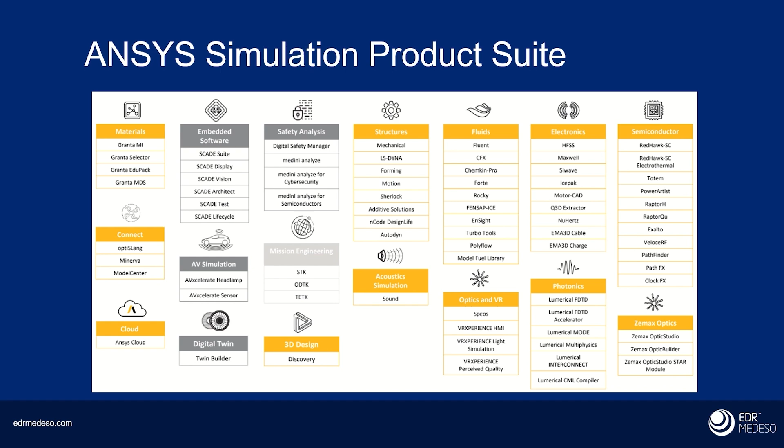So I guess the motivation for using simulation software in space specifically is the same as any product, really. There's a phrase that gets used that you've got to get a design right first time, and simulation helps you do that. It helps you test your product in those scenarios that it's going to be operating in. And that's never really more important than it can be in space, where it really has to work first time.

So we see a lot of developments on the commercial space side, lots of companies springing up, startups and so on, rapid development cycles, alongside the existing R&D in the academic institutions and the government agencies as well. So a highly active industry area.

It's very important to get these designs right, and simulation can play a key role in that. If we consider any product that has to operate in space, you can see there's all sorts of physics occurring, and they're not working independently. We quite often have to consider interacting physics, whether it's electronics, cooling, thermal considerations, fuel or propellant management devices on the fluid side, and also a lot of materials technology that goes into these products. So it's a wide array of potential applications where simulation technology can help.

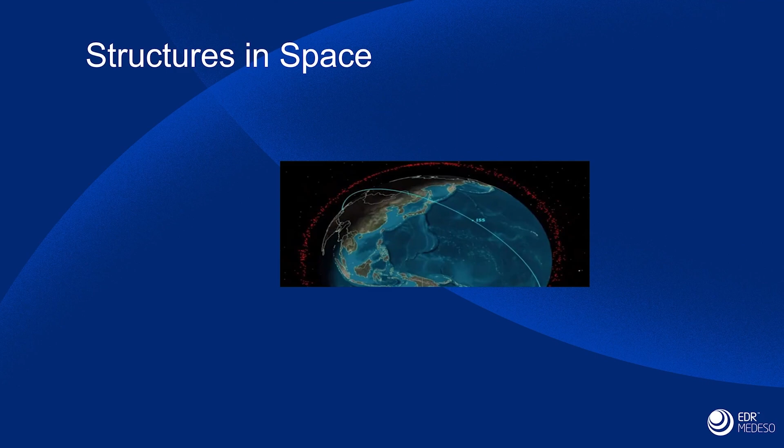Thanks, Steve, and good morning, everybody. I've only got about 15 minutes, so really what I'm going to give is a light touch introduction to a few examples of structures analysis in the space context, ranging from coupled thermal, optical, and structural analysis, to standalone mechanical analysis, impact and explicit methods, right through to PCB reliability and composites assemblies. Then in one example I'll go into a bit more detail on the steps involved in a CubeSat analysis.

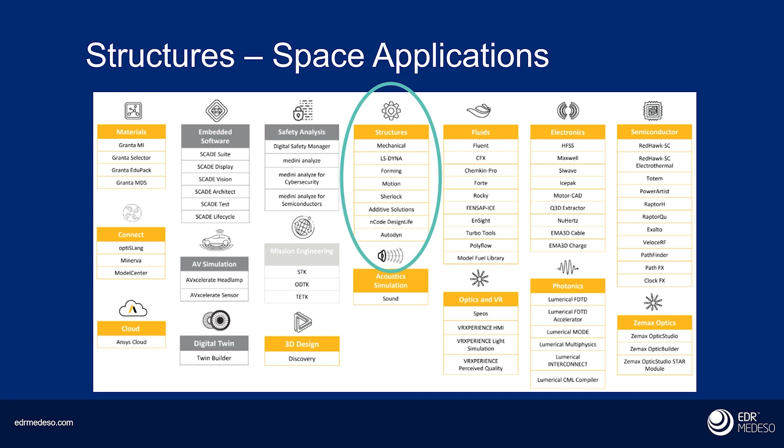As mentioned, I'm going to focus on the structures subset of the Ansys portfolio—ranging from Mechanical, LS-Dyna, and Sherlock right through to Design Life. But I'll also talk about how these products interact with the other physics solvers available, and I think that's a theme running through this whole webinar.

First, a bit more detail on the various structural products. On the left here we've got Ansys Mechanical, perhaps the original and core structural solver of the Ansys portfolio. It provides an incredibly broad range of implicit static and transient analysis methods, some of which we'll touch on today. It's capable of structural, thermal, and vibration analysis amongst many others, and has a really strong focus on providing coupled analysis methods with other solvers, which we'll also talk about.

Then we've got the explicit solvers—LS-Dyna and Ansys Explicit, which isn't shown here but is part of the Ansys suite, and also Autodyn. These enable analysis of highly non-linear scenarios, or events involving extreme degrees of deformation or significantly changing contact conditions, or which occur over short durations—explosive or hypervelocity events. LS-Dyna in particular also offers a strong baked-in multi-physics capability with fluid, electromagnetic, and thermal solvers.

We've also got more manufacturing-oriented products such as Ansys Forming for metal stamping, and the additive solution for simulating additive manufacturing processes, which has in fact been used to great effect in recent space applications. Then there's Sherlock, which provides predictions for electronics hardware, looking at thermal and vibrational durability of PCB assemblies, for example.

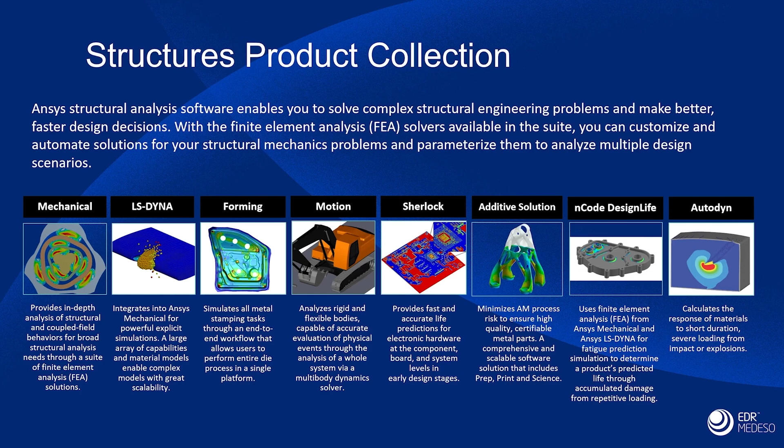In space, the structural response to thermal loading is clearly of key importance, and this functionality is one of the primary analysis methods available in Ansys Mechanical. We can represent the thermal properties of various materials—things like expansion coefficient, conduction, convection, and radiance coefficients—and investigate how those thermal loads and heat transfer will affect the structural performance of our systems.

These materials data are available within materials databases in the Ansys suite. There's another product called Granta, a very full-featured and rich source of materials data, or you may have your own bespoke properties which you can input—things like thermal expansion coefficients, Young's modulus, or Poisson's ratio. What we want to do is predict how thermal and heat loading will affect structural performance, ranging from a straightforward differential expansion problem right through to utilizing the latent heat capabilities of wax solidification to provide cooling in heat pipe systems.

I mention that because it was done quite recently on the James Webb Telescope, so I have some knowledge of that. In addition, you'll see I've mentioned Icepak here. This touches on the coupling capabilities within the suite, which are a massive focus within the Ansys environment. Icepak enables a heat transfer solution using a CFD method within the satellite components, and this predicts the conduction, convection, and radiation. Those resulting thermal loads are fed back into mechanical to provide thermal boundary conditions, enabling the structural response to those thermal loads to be investigated.

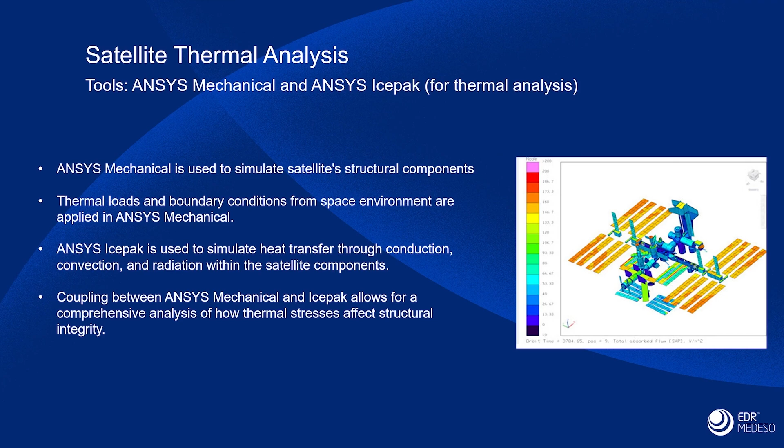Another example of the importance of including thermal effects is their effect on optical performance. Everything these days needs an acronym, so this is referred to as STOP, Structural Thermal Optical Performance. What you can see here is an example of an optical mechanism where the transient thermal analysis drives a transient structural analysis, with a link to SPEOS in there, which enables optical analysis. So you can see the transient thermal driving a transient structural, with a SPEOS input there.

This system is subjected to a 3-hour sun load, for example, and the loading from that exposure to the sun can then interact - we can generate the thermal loads and look at how that affects the deformation of the structure, and ultimately how the optics behave. So you can see that these Ansys multi-physics solutions enable you to examine these effects in any combination and get a really good prediction of what's going on, helping mitigate and eliminate reliability problems and design safe and effective products.

You'll all know it's highly expensive, if not impossible, to replicate the operating conditions experienced in space using physical testing. So analysis is really essential to underwriting the performance of these assemblies, in this instance structurally, but as you'll see from my colleagues' subsequent presentations, electromagnetically and for the fluid responses as well.

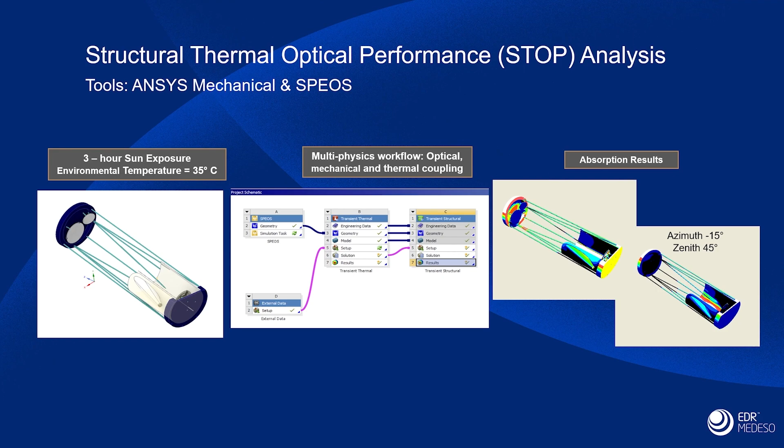So what I'd like to do now is run through a small case study on a CubeSat multi-physics solve. I'm going to focus absolutely on the structure side of things - certainly not going to steal Fatima's thunder, as she's going to talk about HFSS in a lot more detail - but it's worth noting how closely the analysis methods are coupled.

As you can imagine, when we launch and then deploy these satellites, we've got load conditions of highly fluctuating temperature, high and low pressure environments to be considered, and a huge range of vibrational loading. But at all times, we've got to maintain the structural performance and reliability under all of those load conditions.

One way we can do that is set up what we see here - a system of interacting analyses where we feed in our geometric configuration from an HFSS model. We put that into a transient thermal solve, and then the thermal results inform the static structural solve. From there we can get a prediction of the deformations, stresses and strains within the structure, and underwrite its performance.

But in a similar vein, we know that the HFSS performance is going to be very much governed by the deployed shape of that antenna, as that balloon is inflated. So what we can do is a structural solve to get the deformed shape of the antenna, and then this can inform an HFSS solution, which gives an idea of the electromagnetic performance of that antenna. So you can see it can be very much a two-way process, and these physics can strongly interact.

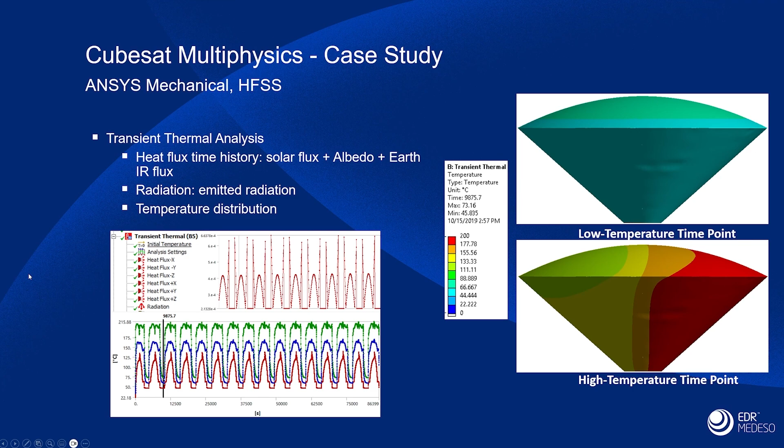So here we go - this is an idea of the output from the transient thermal analysis. We've got a heat flux time history, an idea of the emitted radiation, and ultimately we get a prediction of the temperature distribution through the structure.

And that temperature distribution is then fed into the static structural analysis, and we can predict the resulting deformation and the stress and strain distributions within the structure. Importantly, in this case, what we get is an idea of the deformation of the antenna.

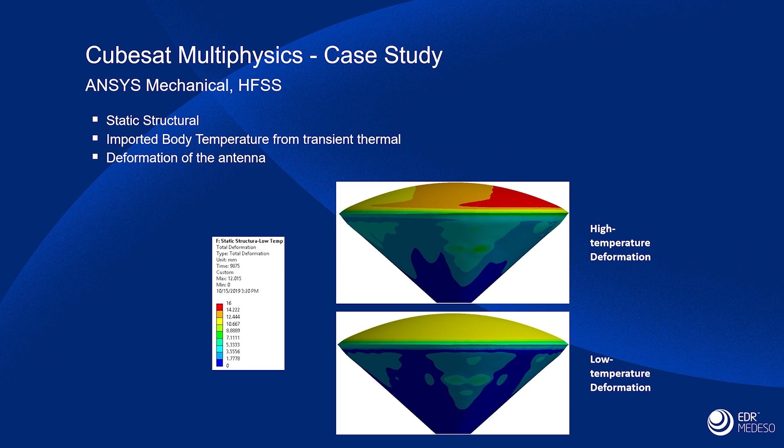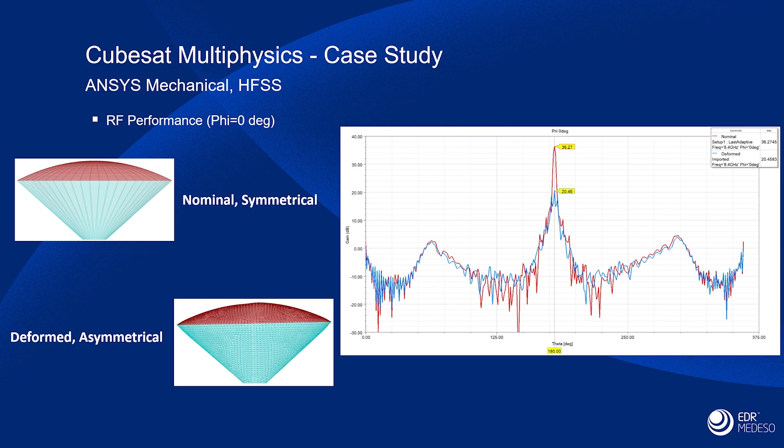That deformed shape can then be fed back through to an HFSS simulation of that antenna response. I'll let Fatima go into the details of this, it's outside my scope and area of expertise or experience. But what you see here is that the nominal shape has a very different response to the deformed shape that we're predicting. So having that deformed shape predicted and informing your HFSS solution is invaluable.

But really, I just want to emphasize here, this has all been done within this pretty easy to set up environment. In Ansys Workbench, we can use these interacting physics and structural solves to inform other solutions and vice versa.

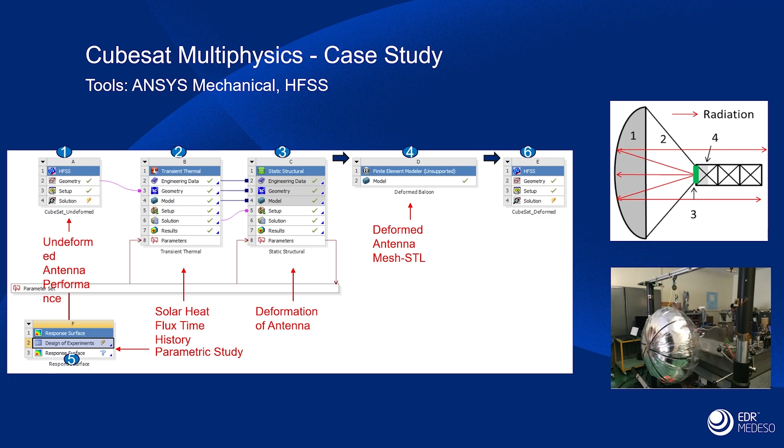I've got another example here. This is a composite propellant tank. Again, we've got an acronym, PMD, so Propellant Management Device. And this has to withstand high internal pressures, in this case 6,000 psi. But what I want to highlight here is this is a filament wound product.

So what we need to do is set up this analysis and have a look at how the fibers are distributed within that composite tank. And then ultimately, perhaps we might want to do a dynamic simulation of this, to look at the modal, the shock, or the harmonics, and random vibration response.

Ansys Composites PrepPost was used here to build this model. And what this does, this really does make the generation and the processing of these composite structures very, very straightforward. And I say that from personal experience of having set up a filament winding simulation in the past without tools like this. It's really quite challenging.

It's tinged with a little sadness that I didn't have access to this 5 years ago, because it would have saved me an awful lot of time, because it really is a very good tool for setting up very complicated composites analyses.

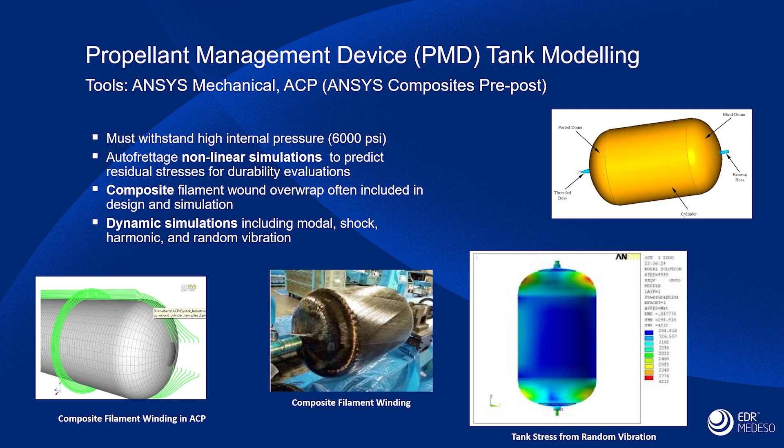We can look at the structural response when we're deploying and assembling these systems. We need to deploy them. In this case, we've got solar panels deploying reliably, with the opening sequences very closely controlled. We don't want things like excessive displacement from attitude control events.

We've also got to withstand the thermal cycling within the whole life cycle, and we've got to withstand shock and impact loads during launch. So all of these different loading conditions can be built into our analysis systems, in this case an Ansys Mechanical environment. And it gives us an understanding of the system's modes of behavior.

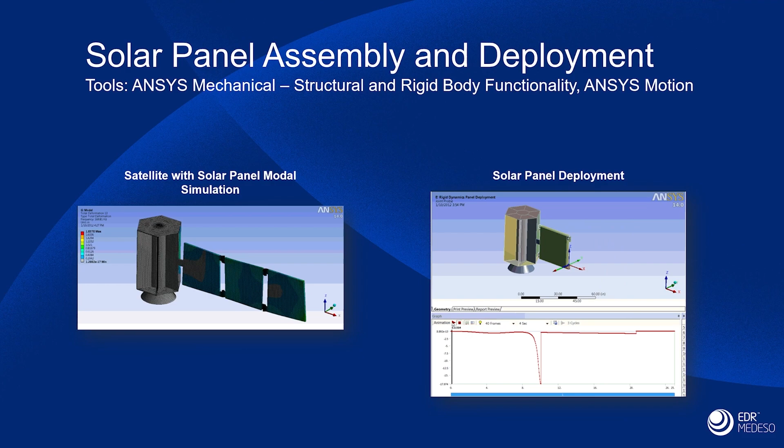Thinking about a totally different scale, we can also use the same thermal and structural analysis capabilities to look at the physical durability of circuitry, in this case a PCB assembly. And what we're doing here, we're solving this structural random vibration loading in Mechanical.

And then those data are fed through to a different software package called Sherlock, which is a specific tool for looking at reliability and durability of assemblies like these. It's another great example of the interaction of the systems, where loading and conditions from one specialist solver are fed into another, so we can get this rich analysis capability within one environment.

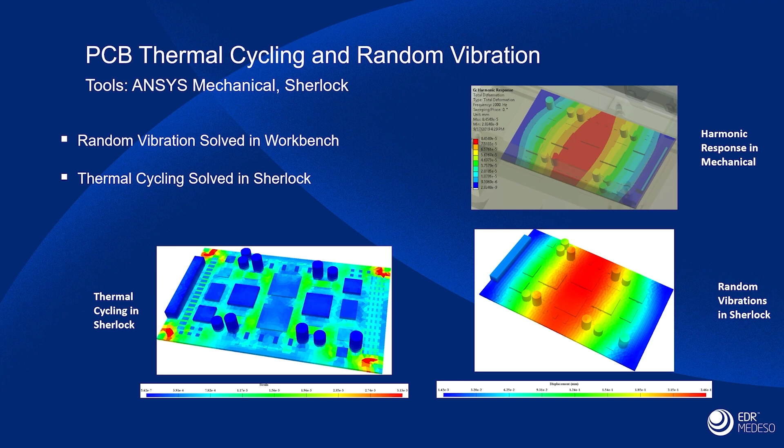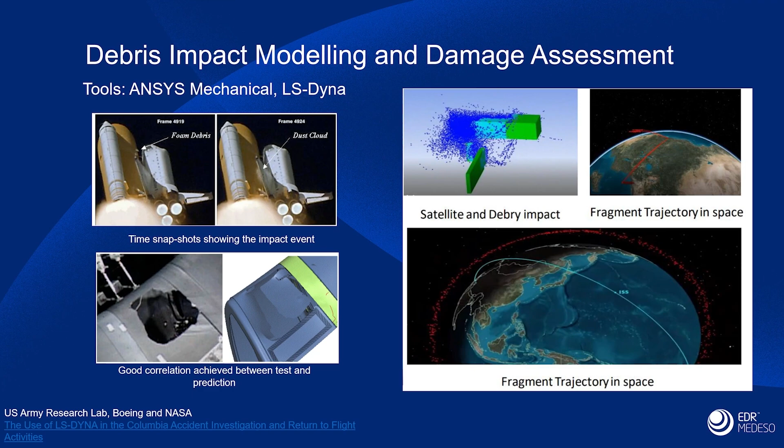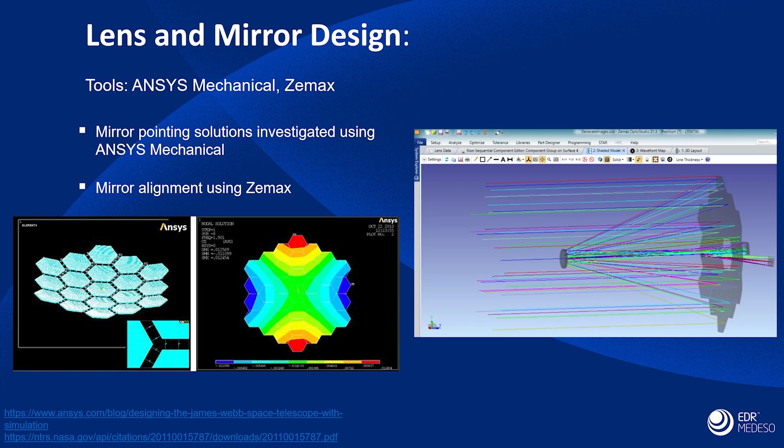And how Ansys Mechanical helped out in that. So I do hope I've given a brief, top level idea of the structural response and the structures side of things. So it just stands to me to thank you firstly for listening. And now I'll pass on to my colleague Fatima, who's going to talk about some of the electromagnetics capabilities within Ansys portfolio.

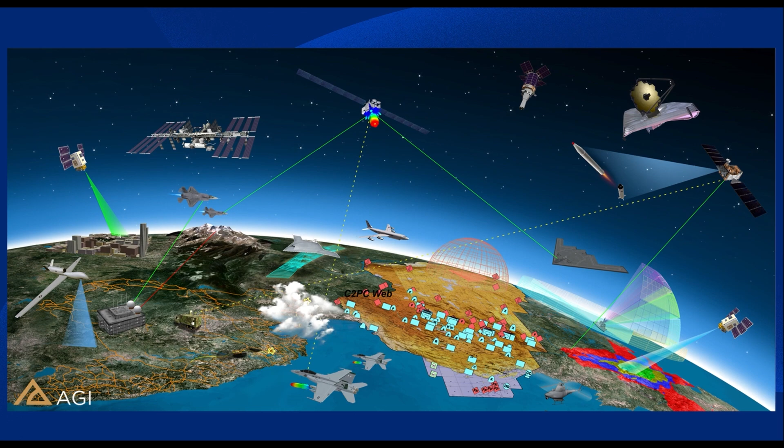Welcome to our webinar. My name is Fatima Howeizavi, and today I'll cover the electromagnetic and thermal physics tools in space applications. In the next few slides, I'll cover critical areas that are essential in space applications, including communication and data transfer, phased array and beam steering, installed antenna performance, satellite co-site analysis, radar cross-section, ESD analysis, thermal analysis, and simulation system in their operation environments.

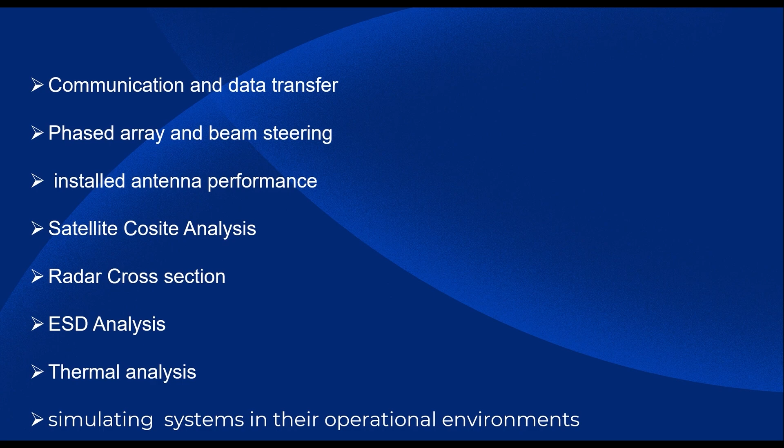When we are talking about space, a satellite, the first thing that comes to mind is the communication, the data transferring, and the main device that can enable the communication and data transferring is the antenna. Antennas are essential in space applications because they enable communication, data sharing, navigation, and remote sensing.

In Ansys HFSS, you're able to create a complex 3D model of the antenna geometry. Ansys HFSS uses finite element analysis for simulation, which gives you very accurate data, and you're also able to do analysis such as radiation pattern, gain, impedance, and other performance metrics using HFSS post-processing. There are optimizer tools in HFSS that help the designer adjust their antenna parameters for optimal performance.

Antennas for satellites can sometimes be complex and time consuming to design, especially if you want to choose a type of antenna and meet all the criteria you need, like gain, directivity, bandwidth, polarization, feed type, and steering. All of these things can make antenna design complicated and time consuming.

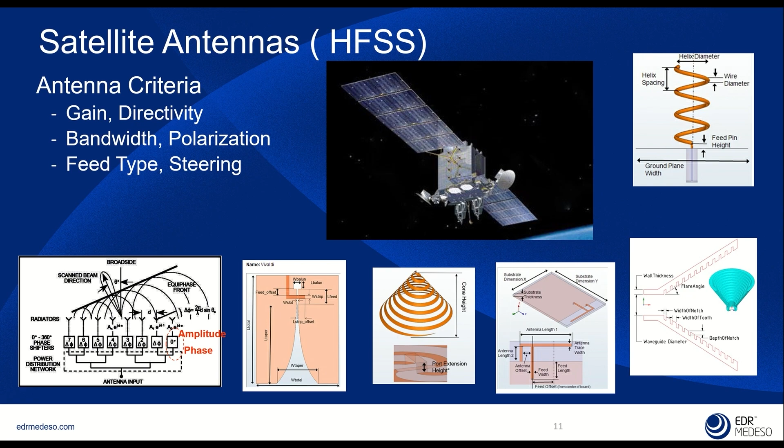Another thing is not always people with an antenna background want to use HFSS to design the antenna. There might be a situation where people with no expertise in antenna design need to have a ready antenna to, for example, integrate it with their system.

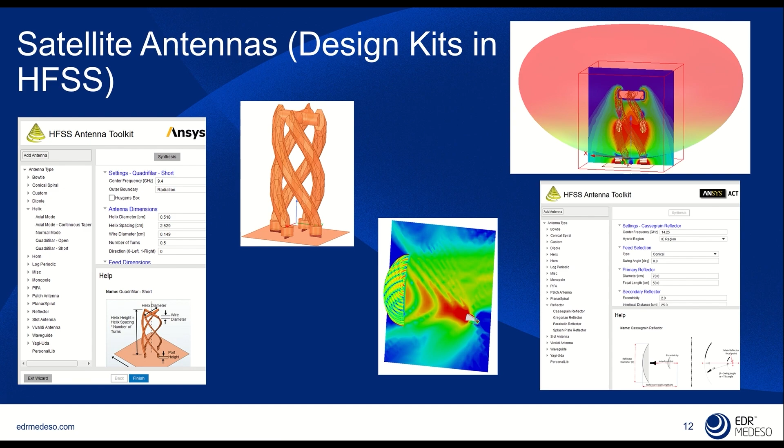So there is a tool in Ansys HFSS called the design kit tool for antenna design. This design toolkit, as you can see in the picture, covers around 10 or 12 different types of antenna. You just need to choose the type of antenna, material, and some of the requirements that you need, and with the press of a button, it's going to create a 3D structure of the antenna in HFSS, and you can do the analysis and see the result.

Another topic which is quite important in space applications is phased array and beam steering, which are commonly used for steering and communication.

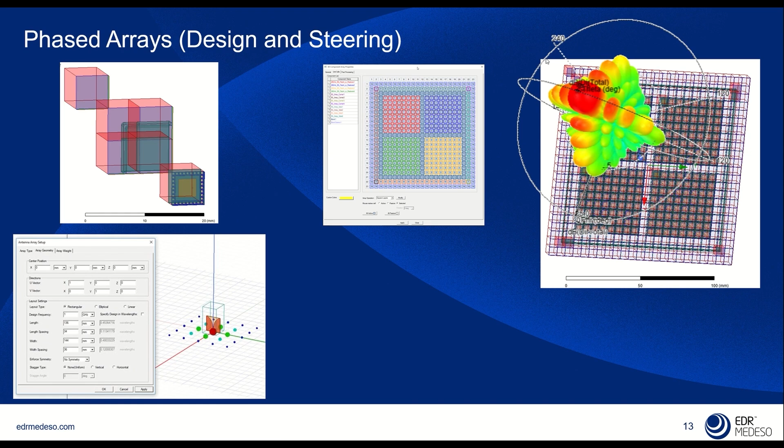In HFSS, there is an advanced tool for designing and simulating phased array antennas, and this helps the designer move from a single unit to an array in HFSS. The HFSS array feature lets you easily replicate and arrange the original unit, creating a grid or pattern of identical elements. This is very useful when designers want to design a phased array antenna, and it really helps speed up and scale up the design efficiency.

Here, I'm going to talk about how Ansys SBR Plus helps designers and engineers. Just think about when you design a simple or single antenna in a vacuum area or in any kind of area where it's not installed in an electrically large environment, you need to see the performance of the antenna after you install it in that electrically large environment.

And this is quite challenging when you're using Ansys HFSS or even any other tools, because normally the antenna, when installed in a satellite structure, is in a very large electrical environment, and it's difficult to simulate. So Ansys HFSS SBR Plus is a high-frequency electromagnetic simulation for modeling EM interaction in electrically large environments. It employs shooting and bouncing ray techniques, that's why they call it SBR, for rapid computation of EM solutions. HFSS SBR Plus computes installed antenna performance, extended near field distributions, far field radiation patterns, and radar signatures from electrically large platforms with minimum computation resources.

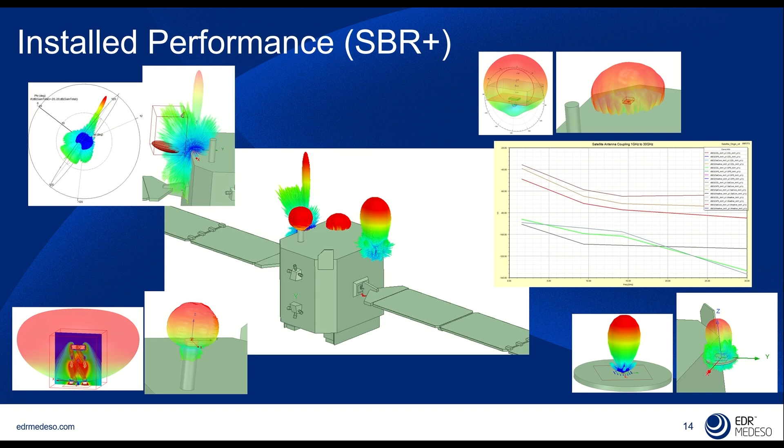The next topic I'm going to talk about is satellite co-site analysis. This is the process used to evaluate and mitigate electromagnetic interference (EMI) and electromagnetic compatibility (EMC) issues that can arise when multiple satellite systems or payloads share the same physical platform or operate in close proximity. This analysis is critical in the design and operation of satellite constellations, where multiple satellites work together in a coordinated manner.

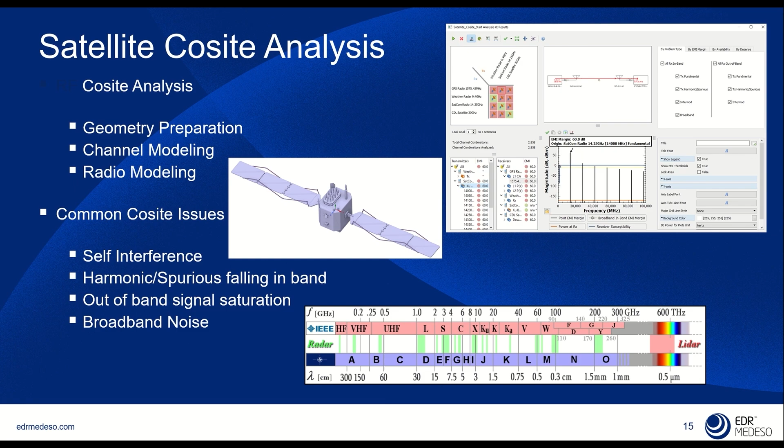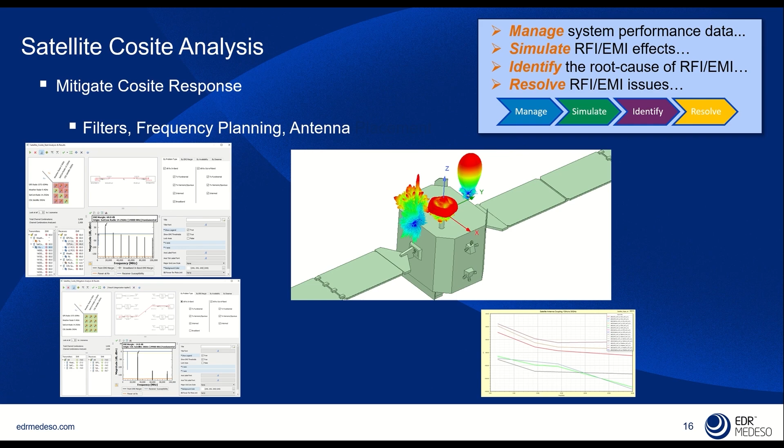Satellite co-site analysis in Ansys helps manage system performance data and simulate RFI/EMI effects. You can identify the root cause of RFI/EMI issues and then resolve them.

The next important analysis for space applications is radar cross-section. Radar cross-section is a measure of how detectable an object is by radar. It quantifies the ability of an object, such as an aircraft, ship, or ground vehicle, to scatter or reflect radar signals back to the radar receivers. Radar cross-section is a critical parameter in radar systems and has important implications for military and civilian applications, including target detection, tracking, and other space technology.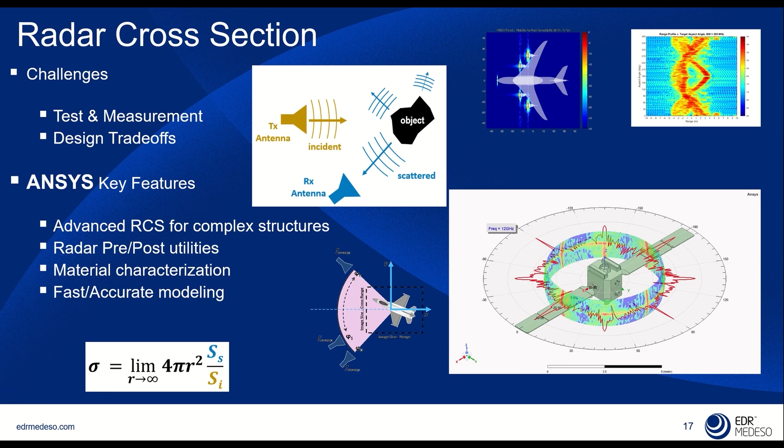In Ansys, we know the main challenge in radar cross-section is testing, measurement, and design trade-offs. With the Ansys tool, we're able to design radar cross-section for complex structures, characterize different materials, and do fast and accurate modeling.

The next important analysis for space applications is electrostatic discharge, or ESD analysis. In space, there is no atmosphere to protect the spacecraft from radiation. Charge buildup from radiation can't dissipate because spacecraft are not grounded to Earth. So spacecraft design must properly mitigate charge accumulation and dissipation on the spacecraft's surface and inside components.

When charge accumulates, it induces electric fields. The magnitude of these electric fields may exceed the breakdown of air, plasmas, or dielectrics and lead to electrostatic discharge. The damage from discharge can cause total mission failure.

There are design standards put in place by NASA and ESA to mitigate spacecraft charging. For small companies or the private sector, meeting these standards and doing the tests to meet them is quite expensive and time consuming. But with Ansys EMA3D Charge, meeting this standard is easier, less time consuming, and less costly.

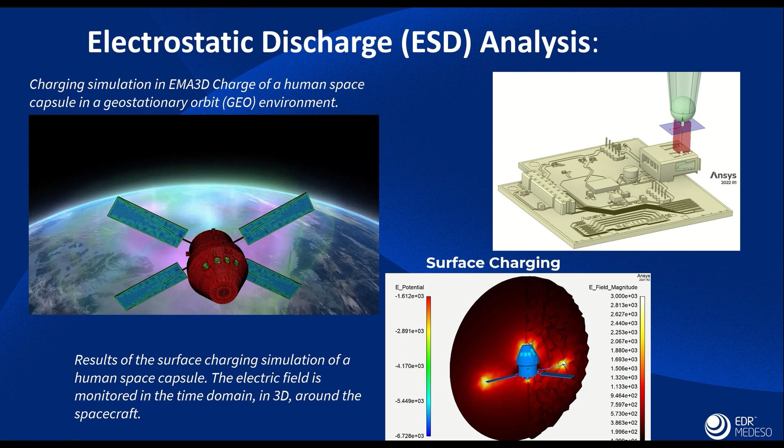So here I'm going to introduce Ansys Thermal Desktop. Ansys Thermal Desktop is a PC-based thermal and fluidic analysis tool for heat transfer, thermal radiation, environmental heating, and fluidic flow design. It can quickly solve component- to system-level thermal and fluidic problems, enabling early design evaluation and rapid design changes, and maximizing testing efficiency. The highlight is that Thermal Desktop is integrated with Ansys Mechanical, Fluent, STK, and ModelCenter.

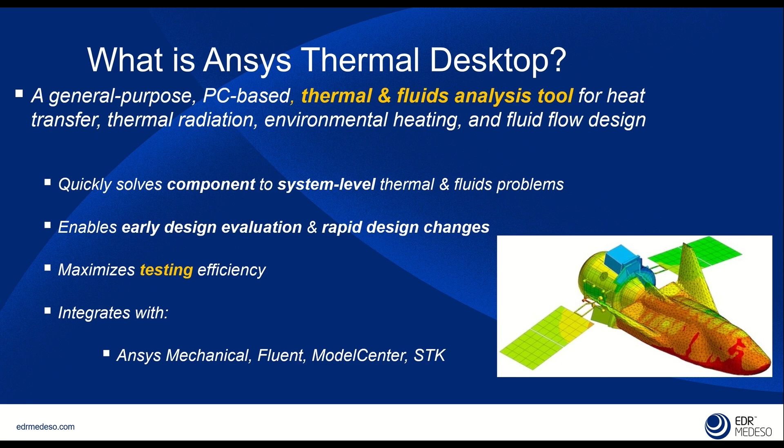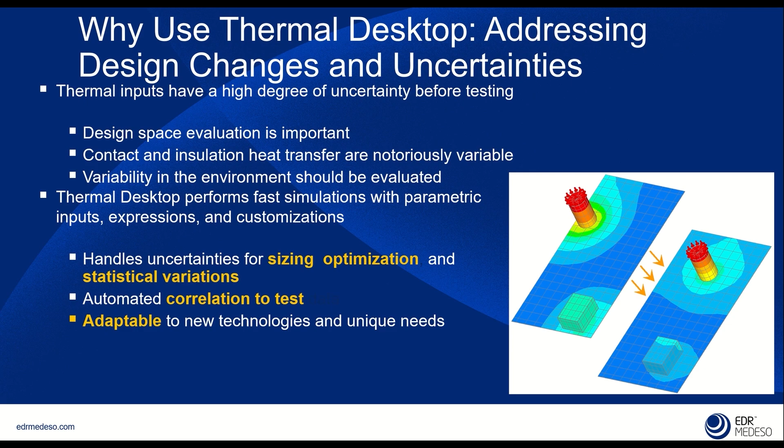In thermal analysis, we often don't have precise data before testing, so it's critical to evaluate our design options carefully. The way heat moves through contact and insulation can be unpredictable, and we need to consider variability in the environment. That's where Thermal Desktop comes in handy—it quickly simulates different scenarios, handles uncertainties, and can adapt to various needs.

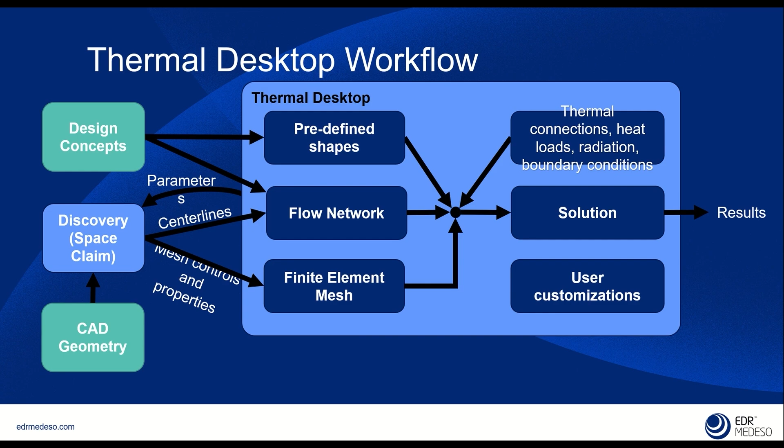Here is a Thermal Desktop workflow. The design concept can be modeled using predefined shapes and flow networks. Thermal connections, heat loads, radiation, and boundary conditions are added, a solution is generated, and result customization is available. As the design matures, CAD geometry becomes available. In SpaceClaim, mesh control and properties are assigned to the geometry. A finite element mesh is generated in Thermal Desktop and connected to the rest of the model.

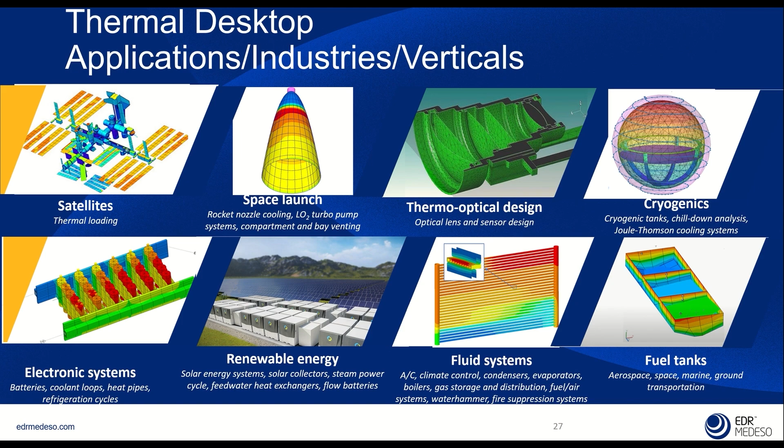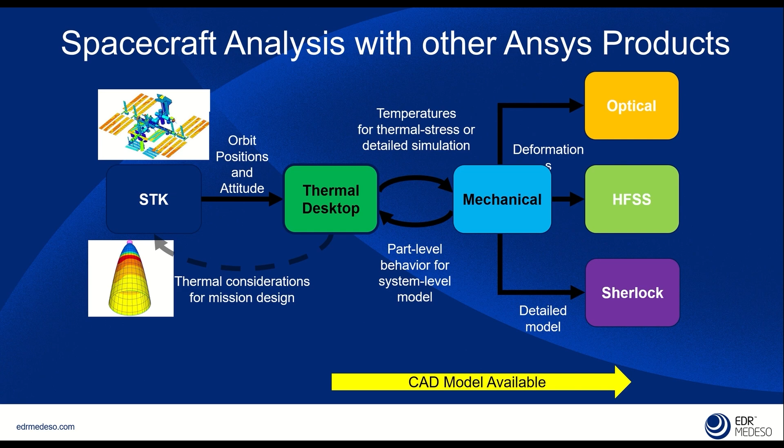Another highlight I mentioned is the integration of Thermal Desktop with other Ansys tools, especially Mechanical. Mechanical, in turn, is integrated with Optical, HFSS, and Sherlock, and this helps engineers work better if they are in different teams or not experts in all of the areas.

One question probably on lots of your minds now is: what is the difference between thermal desktop and other Ansys tools? For thermal desktop, we normally use it when we have a large system with heat transfer between many components or the environment, like a big satellite, spacecraft, launch vehicle, or liquid gas storage - covering overall thermal control systems like surface coating, heater budget, heat exchanger efficiency, flow in piping networks with or without phase change, long time period simulations, and thermal radiation as a major design consideration. But when we use other Ansys tools like Icepak, Mechanical, or Fluent, we mainly use them for designing and analyzing detailed models - detailed circuit boards, components, heat exchangers, or undefined fluid flow.

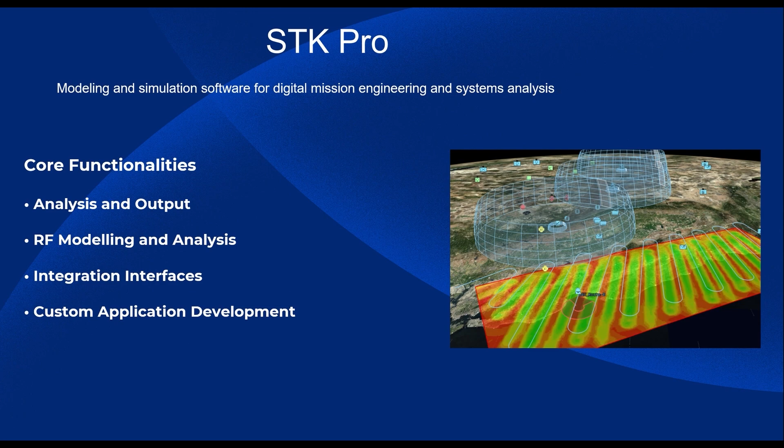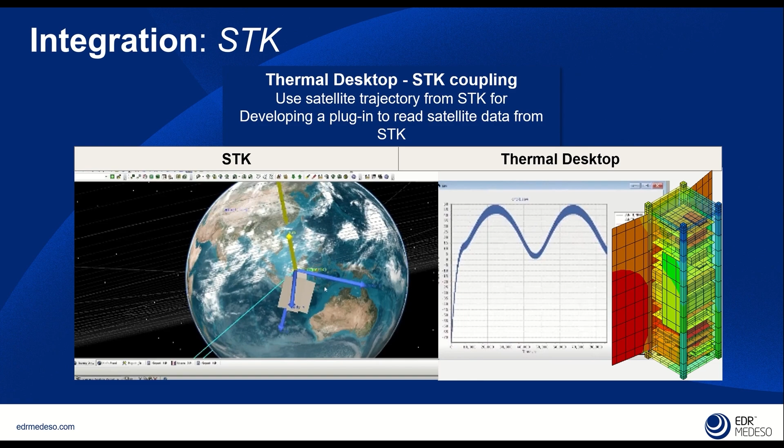In the last two slides, I want to quickly talk about STK Pro. STK Pro is the modeling and simulation of complex systems in their operational environment. With Systems Toolkit, you model complex systems inside a realistic, time-dynamic three-dimensional environment that includes high resolution terrain imagery, RF environment, and more. The STK also has integration with Thermal Desktop, so data from STK can feed into Thermal Desktop for thermal analysis - which is very helpful for space applications.

The last tool I'm talking about is ODTK, which is an industry solution for orbit determination software. With ODTK, you can process a wide variety of traditional and non-traditional measurements to generate orbits with realistic covariance. ODTK can combine a diverse set of measurement types into one seamless result, enabling you to track objects from ground, space, sea, and air using any technology.

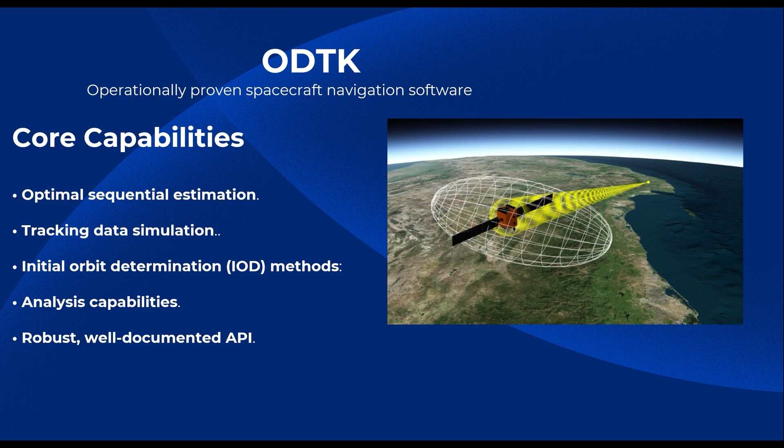Okay, it's Stephen back with you, and we're going to round out the webinar by showing a couple of examples of how Ansys simulation can be used to solve fluids type applications in space.

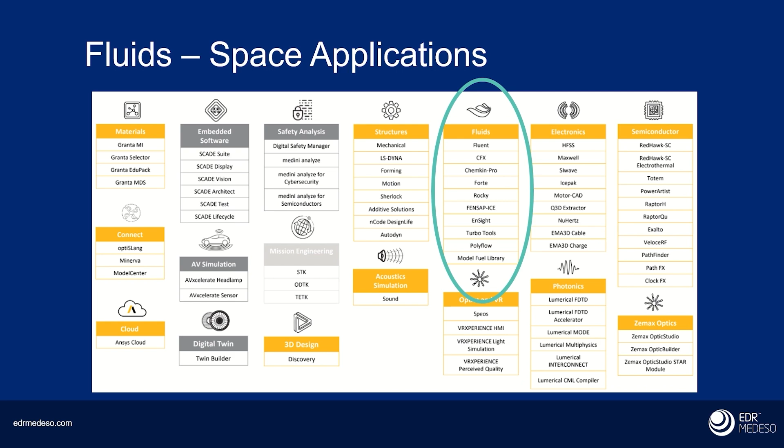First, let's refer back to the product portfolio. This is the fluids product set. When we say Ansys CFD, we actually refer to a number of specialist products. On the left, we have Fluent and CFX CFD solvers - general purpose solvers you can apply to many different types of analysis. In the middle, we have specialist solvers like ChemKin Pro, designed specifically for chemical reactions, combustion, and fuels. Moving along, we have materials processing - manufacturing tools like Polyflow, icing and aerospace icing with FENSAP-ICE, particulate simulation, and here we have Thermal Desktop, which couples different solver physics for thermal applications.

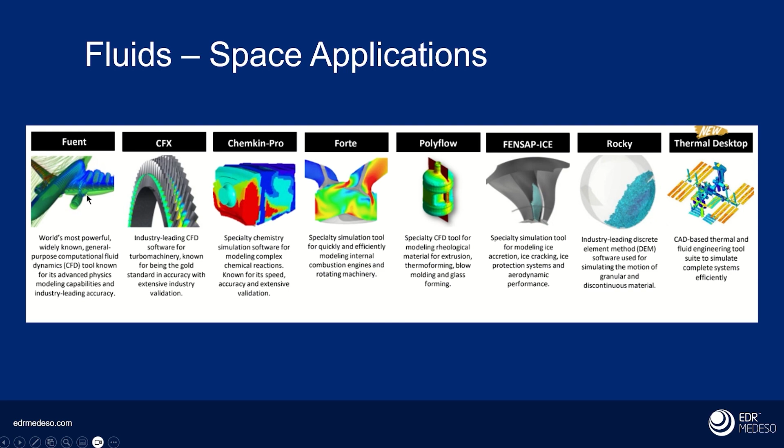We're going to focus primarily on the general purpose CFD side though. One of the most interesting applications relevant to space is fuel sloshing, and there's a number of things CFD can do to assist in the design process here - looking at flow through valves, evaporation and condensation in tanks, filling, sloshing, emptying, and also fluid structure interaction.

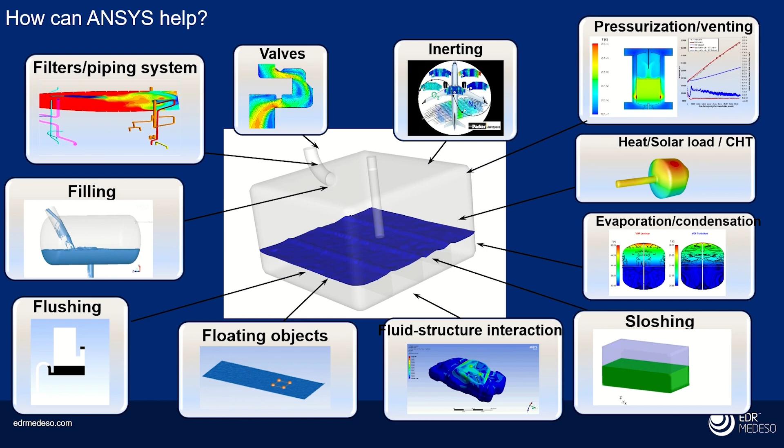This is where we can use the CFD solver to very accurately simulate the movement of fuel in a tank, and then use those pressures and forces to map across to a structural solver, which can then look at the stress and material implications of the movement of that fuel. So we'll look at propellant management device tanks and a couple of simple applications.

So why would we need to do this? Well, if we have fuel sloshing - even on a ground-based application, think about your car when you're braking, or a tanker truck with a large mass of fluid inside it - movements of that fuel can create huge forces. It's very important that this is considered during the design process, because it has massive implications on stability and can cause all kinds of problems.

This has traditionally been accomplished through various analytical methods. For example, sloshing motion during flight conditions can use methods such as pendulum or spring mass systems, which can go so far but have their limitations. Really, the only way to get as close as possible to the actual movement of fuel inside a tank is to use CFD analysis. CFD using Ansys Fluent can provide that insight.

All we need to do is provide the representative operating conditions. Once you've done that, you can get the entire operating cycle of a propellant tank - all of the forces, pressures, and so forth. And that's just going to lead to a better tank design.

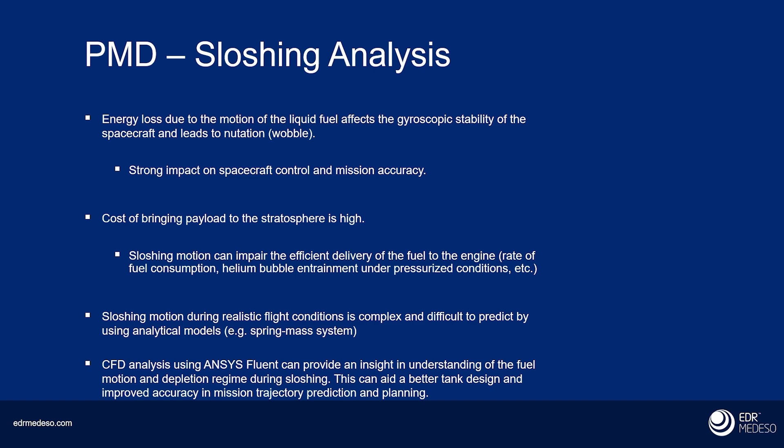Generally, rockets are powered by liquid fuel, which is stored in a pressurized tank that's subject to gravity forces and inertial forces as the rocket is under motion. Normally we'd have pressurization with an inert gas inside the tank, and as the fuel is getting depleted, that's accompanied by movement of the fuel or sloshing, which causes forces onto the tanks.

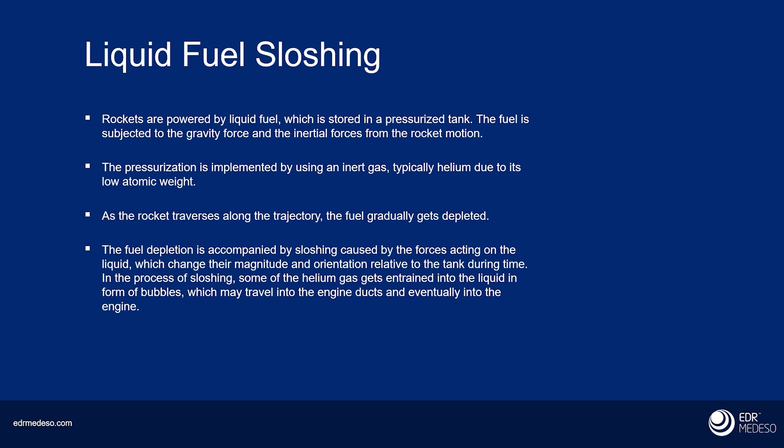There's also the possibility of getting aeration. Some of the gas can get entrained into the liquid in the form of bubbles, which can then get into the engine ducts and into the engine. So these are things that we want to avoid.

Primarily, we do this to promote stability. We want to promote continuous, uninterrupted delivery of fuel to the engine and eliminate the possibility of any kind of engine malfunction due to gas bubbles getting entrained into the engine itself.

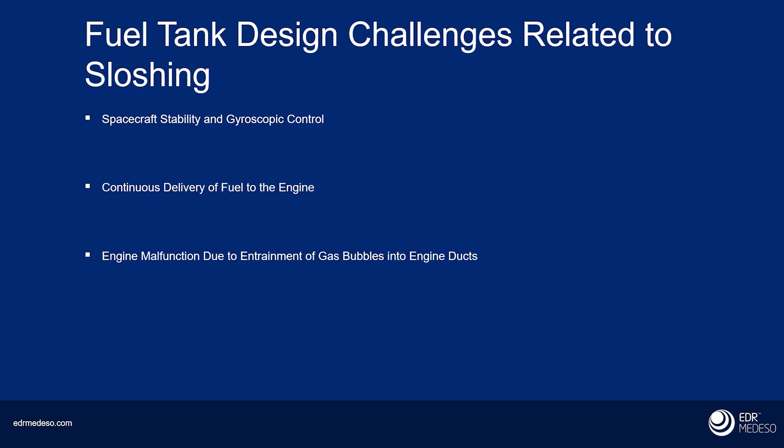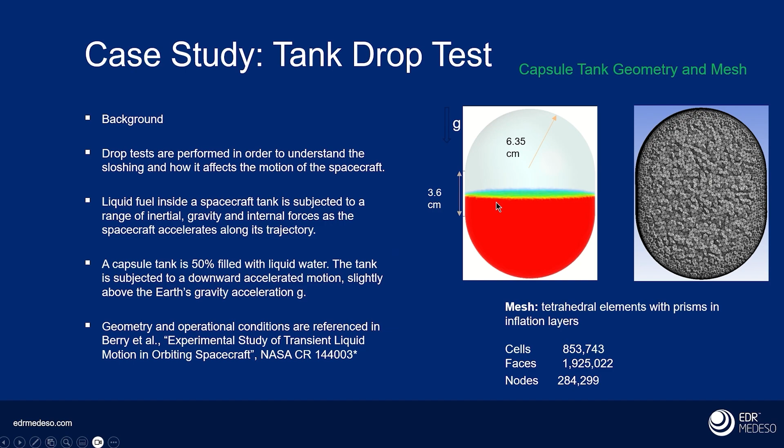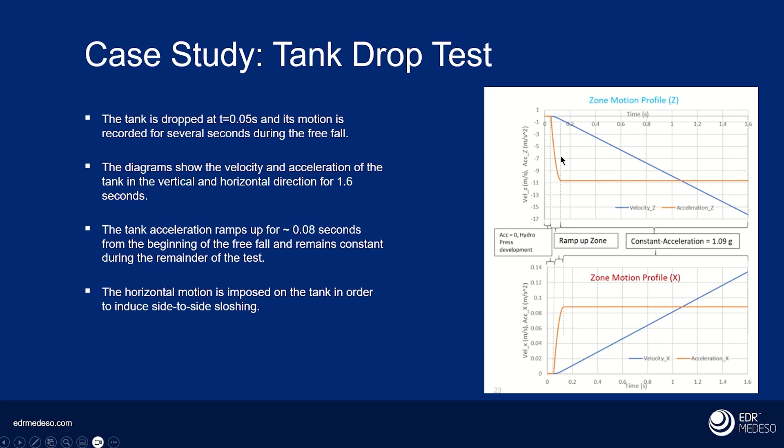So these are typical motion profiles that we'd use as an input into Ansys CFD. We've got the Z and X profiles here, which give us the acceleration that the tank is subject to. This ramps up for just 0.08 seconds. The simulation time is just over 1.5 seconds.

Now, when we run the simulation, this is what we get from Ansys Fluent. The coloration here is actually a scale from 0 to 1, which represents a volume fraction of the fluid. Where it's red, that means it's 100% fuel. The blue is the gas.

What it can output at each time step is the precise position of the fuel as the tank is subjected to those external loads. So you can see that compared to any analytical method, the CFD is able to give us a very accurate understanding of what's actually happening to the fuel as the tank is subject to the loads it would be under in operation. The interface between the fuel and the air is very accurately captured.

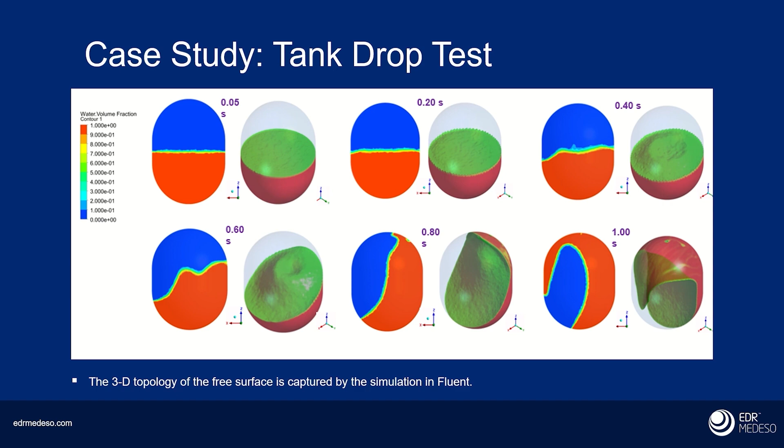Having this information gives you a much better chance of designing mitigation methods that can either control the motion of the fuel, or at least give you an understanding of how that motion is going to create potentially other problems, such as the forces as it's impacting the side of the tank and any possible air entrainment.

So typically these are the results we get out of this CFD simulation. I've got the force over time of the 1.6 seconds that this was run.

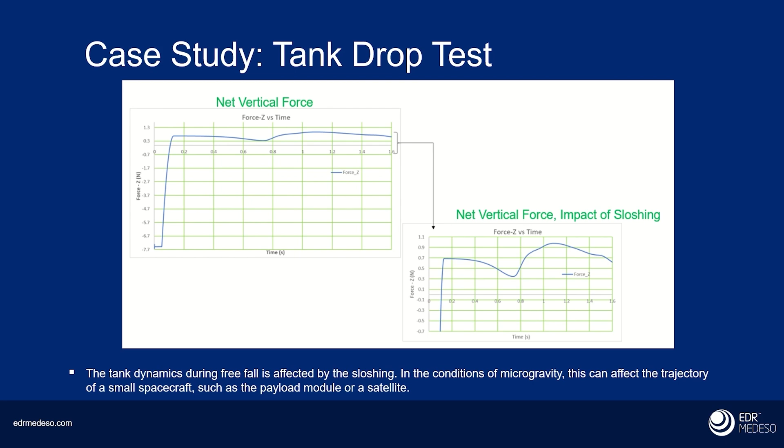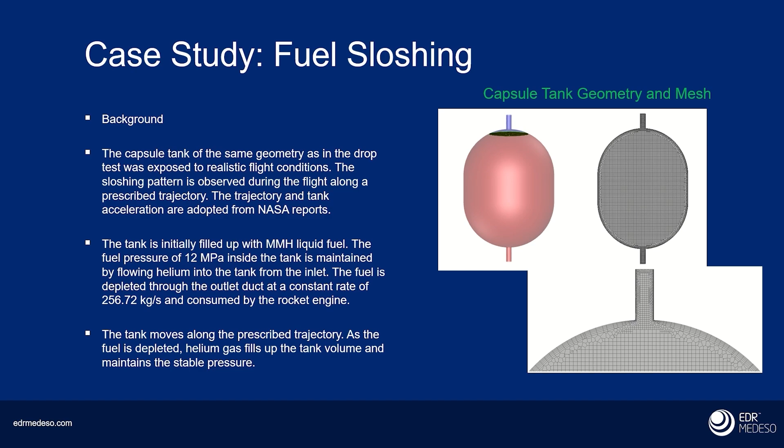Another example using a similar tank - again a capsule tank. This simulation using CFD replicates the launch conditions of the tank. Again, we've got a tank which is initially full or filled with liquid fuel, pressurized, and we've got helium flowing into the tank from the inlet. As the launch process goes through, that fuel is obviously depleted, and also the tank is subject to external accelerations.

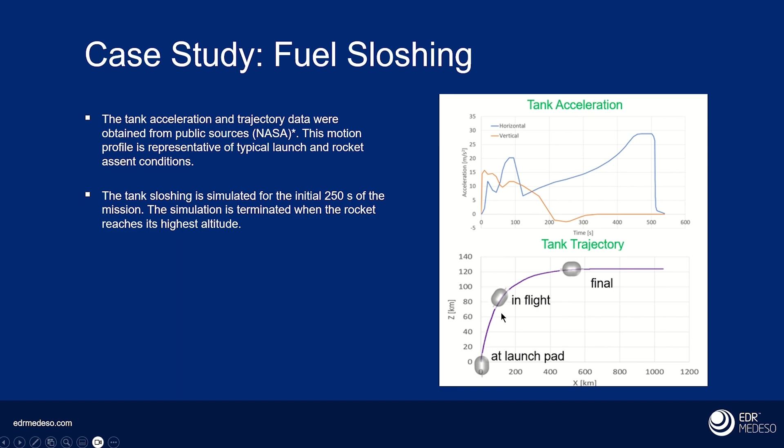Typically, this is the input profile we have here - acceleration in terms of horizontal and vertical. The horizontal acceleration is giving us the sloshing. This simulation is run for the first 250 seconds of the mission. And this is just a typical representation of the tank trajectory as it's being launched.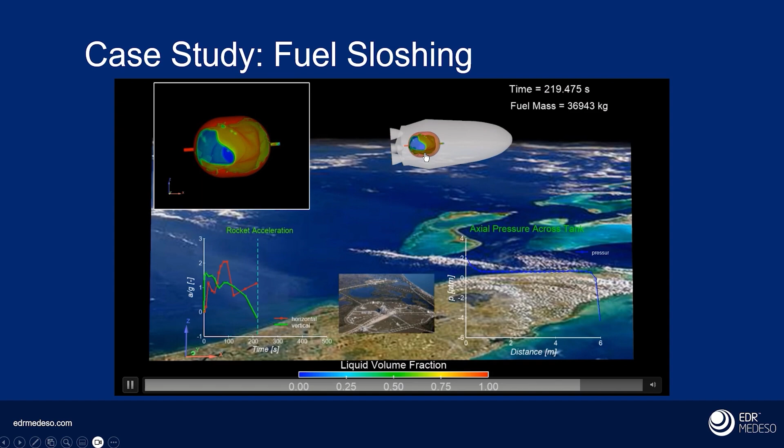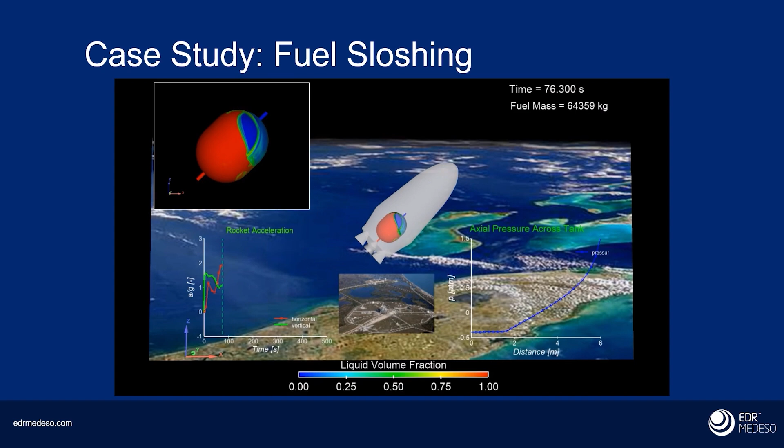Hopefully from this animation, you can see that level of detail is far beyond anything you could get from a more simple analytical method. So using CFD in this way gives you data that is as close as possible to the real experience of the fuel sloshing during a launch procedure.

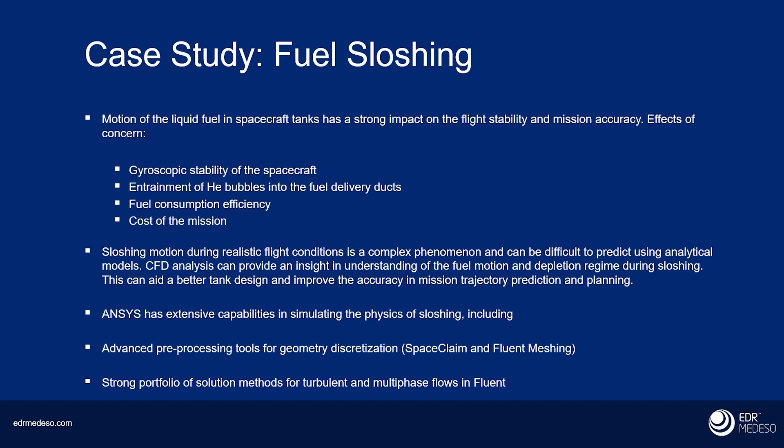So that was the first example I wanted to show you. We've shown how CFD can give you information that helps you understand the stability, helps you understand any potential entrainment of air bubbles and so forth. With that information, you can design either the product itself or make adjustments to the mission to mitigate any of those issues. Another example I'd like to look at here is...

This is more of an aerospace example. We're looking at the actual launch, separation, deployment, and impact and recovery. This is quite a traditional application of CFD in the aerospace world.

So we're looking at atmospheric impacts here. CFD lends itself very well to external aerodynamics - essentially simulating the airflow over an object, and at high speeds, we have to think about things like viscous heating and so forth.

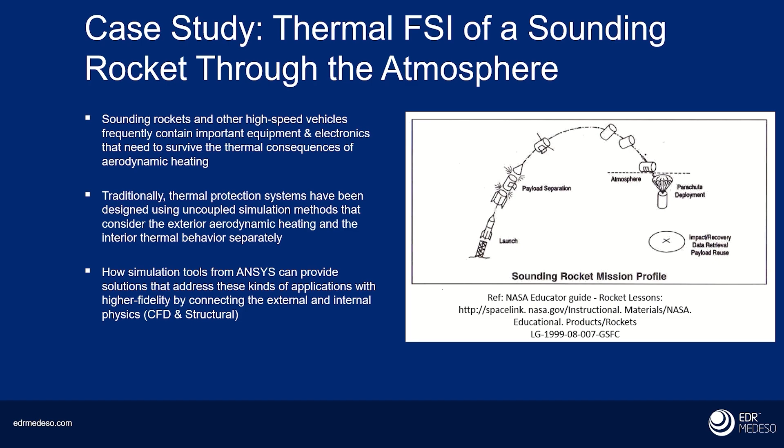Another factor to this is that we can use CFD in conjunction with another physics solver. So, for example, mechanical. And here we have a nice application of fluid structure interaction on an external bluff body.

So what we're doing here is we're running the CFD simulation to give us the pressure and force data, and then we're passing that over to a structural simulation using Ansys Mechanical. This can happen as a one-way transfer, so for example where aeroelasticity is quite minimal.

Or where you have large deformations, you can do a two-way analysis where data is passed back and forth between the two solvers. As you can see here, where we have large deformations, this would be a fully two-way FSI analysis. The operating environment in Ansys makes this really easy—you can just drag and drop different analyses onto each other, and they will pass the data between them.

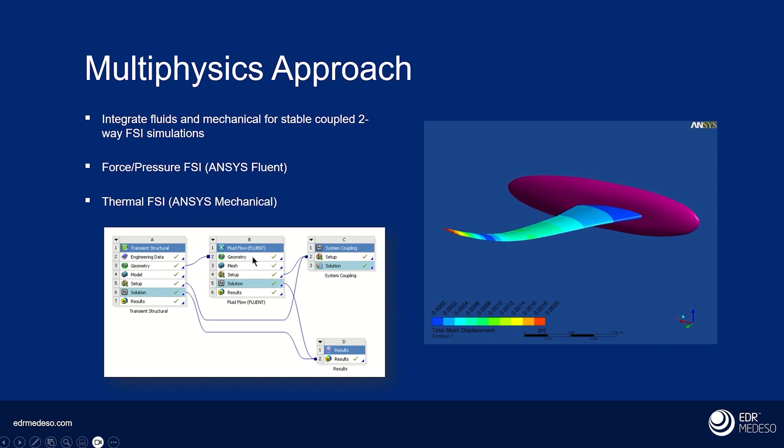So just in general then, multi-physics—that's an example of fluid structure interaction, but you can also combine electromagnetics. You can exchange data between any one of these three solvers. That's increasingly important because not just in space applications, but anywhere, you have to consider the coupling between physics.

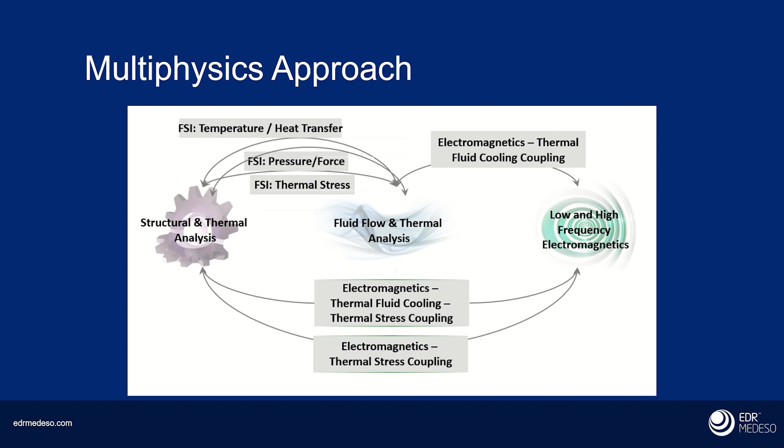So back to our little case study then, the sounding rocket through the atmosphere here. We've got our input profiles—Mach number, altitude, angle of attack, temperature, pressure. We're conducting a CFD analysis to get the external aerodynamic forces that are occurring, and combining that with a structural analysis to look at the thermal effects of the materials in the actual craft.

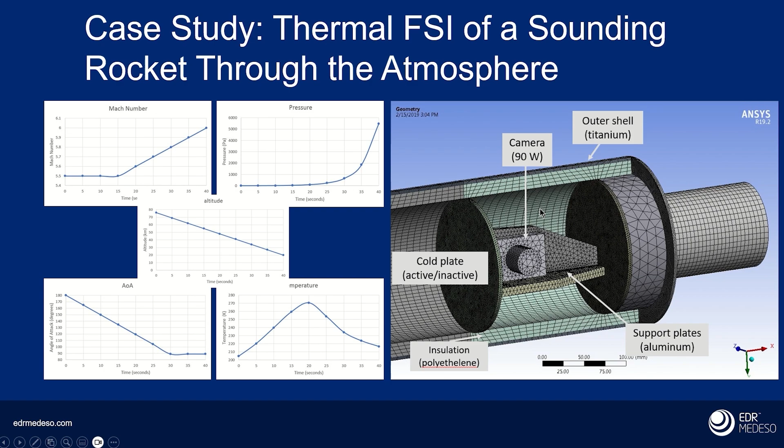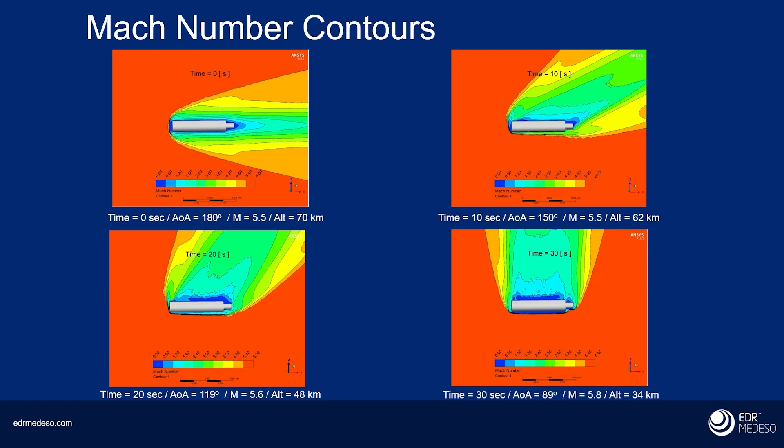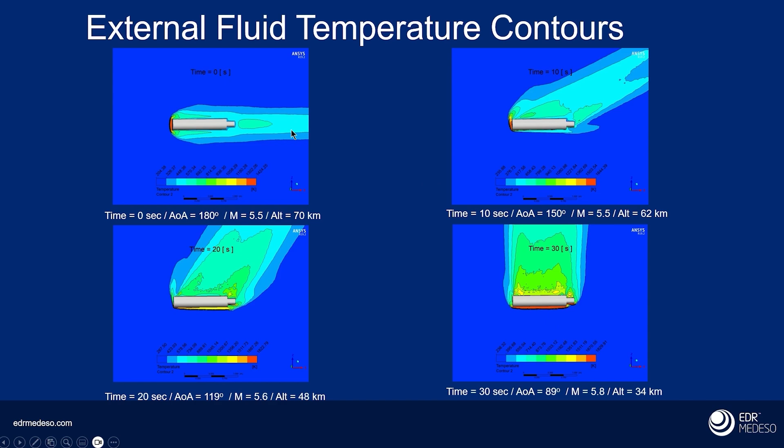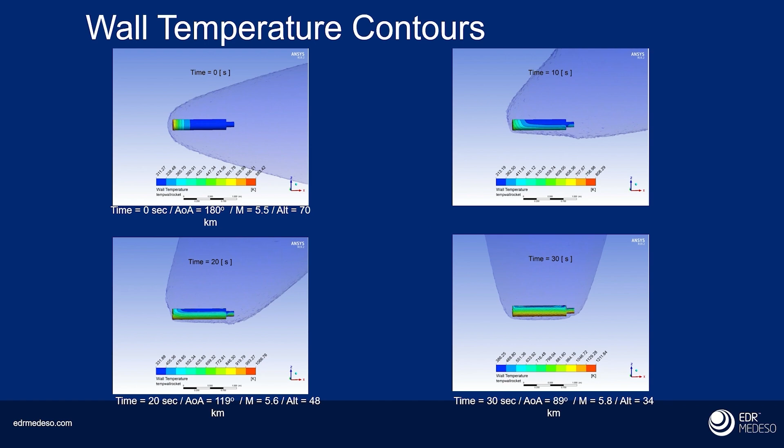So typical results from this type of analysis—first, looking at the external airflow here, we've got our Mach number contours at different times from 0 to 30 seconds. We've got our external fluid temperature contours here, again from 0 to 30 seconds at different parts of the operating cycle. And then we can start to look at the thermal structural side—wall temperatures and internal component temperatures.

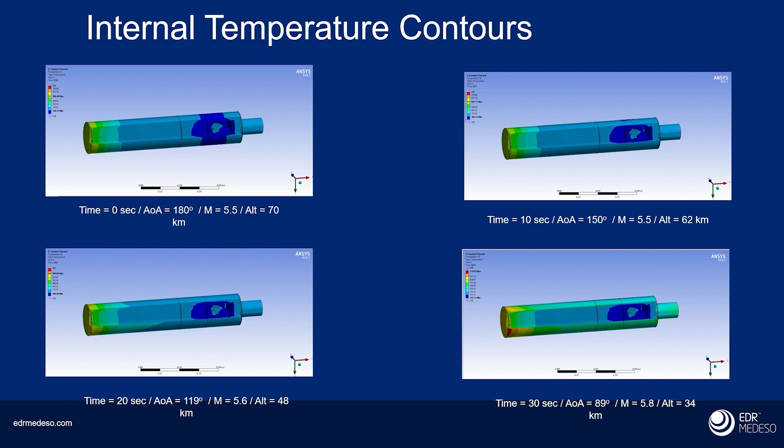Okay, so that's on this slide. This is the Ansys Mechanical analysis, conducting a thermal analysis of the internal components based upon data it's received from the CFD analysis. So a nice simple example of how you can use CFD and combine that with structural thermal mechanics.

So we use this to simulate a transient re-entry and look at aerothermal behavior. Essentially we're using what we call system coupling or multi-physics, and that involves a number of data transfers. We're transferring near wall temperature from the Fluent CFD solver to Mechanical, a heat transfer coefficient from the Ansys CFD Fluent solver again to Mechanical, and then we're taking wall temperature back from Mechanical to Fluent.

But that's just one example of multi-physics. Again, you can include structural deformation, and you can also include electronics solvers as well.

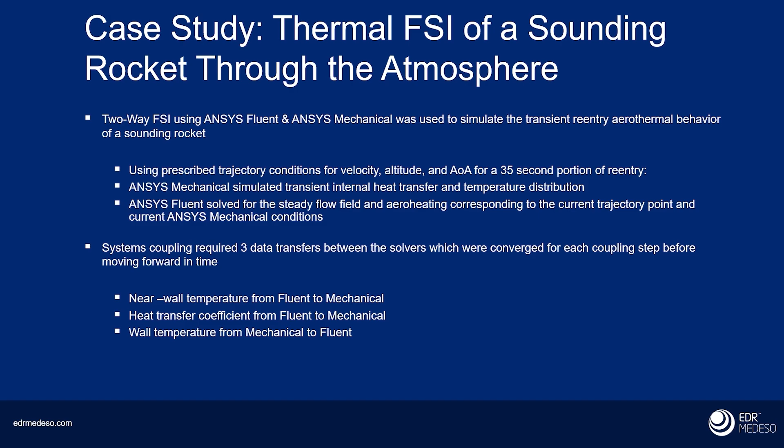Okay, the options for that kind of analysis are either steady, where you have a steady frame of reference, or fully transient—so if you think back to that deforming bluff body I showed you, that would be a fully transient two-way FSI. Depending on the precise circumstances, you might be able to simplify that and have a one-way FSI. The difference is essentially compute time, but either one of these methods is available and made easy for you to do.

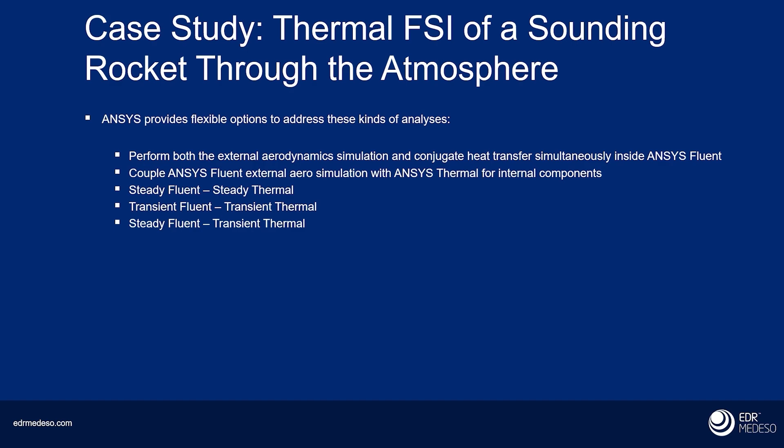Okay, so I'd like to conclude the fluid parts of the presentation here, and I'd like to hand back to our host. But just before I do that, I'd just like to thank you for your attention, and hopefully you've seen some examples here which are interesting. If you do require any further information on anything you've seen today, we would be more than happy to open a discussion with you. So thank you, I'll hand you back to your host for today.